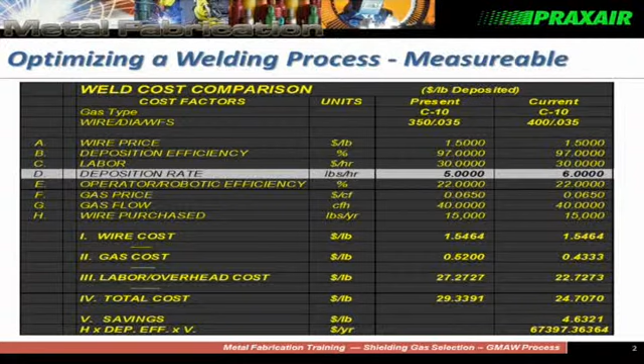One of the other things we don't often consider, in much of the welding done in North America and Europe, is that the cost is not so much in the consumables, but in the labor and overhead cost. That's obviously affected by deposition rate and welding speed, but also by how much post-weld processing we need to do, and the impact of welding fume on the overhead operations of our facility.

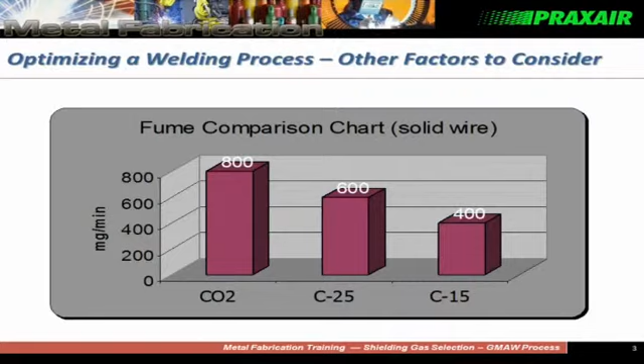So let's take a look at a couple of other factors that may affect this. We've heard about fume—just changing the shielding gas for a gas-shielded welding process can lower the fume, going from CO2 to 25% CO2 in argon, or 15% CO2 in argon. As we lower the CO2 content of the shielding gas, it affects the amount of welding fume generated. That's one thing we could look at.

So again, a little less post-weld processing would affect this operation. Spatter level and bead shape also affect the productivity and cost of the welding operation.

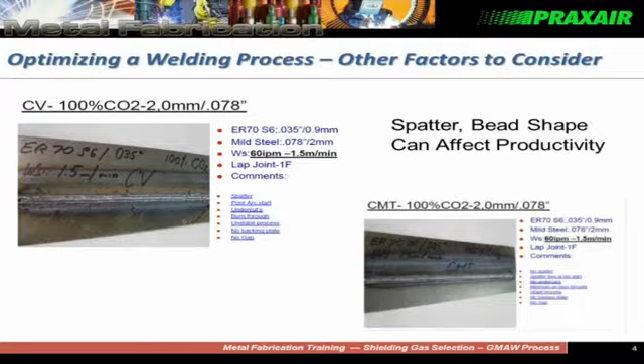So we're going to walk through a little bit of the process optimization steps you might consider. Typically for a given operation, you'll have a material type, thickness, and surface condition to deal with—it's the material you have to utilize in your facility.

Most typically, you'll have selected a welding consumable type—maybe a flux cored wire, a solid wire, or a stick electrode, but we'll focus on gas-shielded processes here. Typically, you'll have decided on the process based on the equipment. With flux cored or solid wire, it could be globular transfer depending on the shielding gases used. With solid wire, it could be spray transfer, short circuiting transfer, or pulsed metal transfer. So the equipment will, to a degree, determine the process we can use.

But some of the variables we don't often look at are the shielding gases—I mentioned earlier it could affect fume generation—and the welding power source. With the technology available today, if you go down on the show floor and look at the major suppliers of welding equipment, you'll see you can literally tailor the output of that power supply to a specific welding process and a specific welding material. I'll show you a couple examples of that.

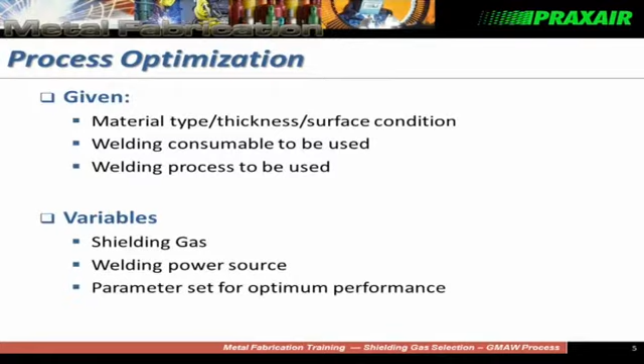And then lastly, we talked about optimizing the performance—are you using the appropriate current levels, voltage levels, and so on for the actual application, or can those be adjusted to get better performance?

The example I'm going to use is welding high nickel alloys, sometimes stainless steels, but typically high nickel alloys are very challenging materials to weld. One of the reasons is the weld pool is very viscous—it's not fluid, it doesn't want to flow well. So you tend to get weld beads that are not very well wet out, and travel speeds are slow because the material doesn't want to flow.

Typically, in other welding operations, you might add something like oxygen or CO2 to a shielding gas to improve the fluidity of the weld pool. But with nickel, you get a very tenacious oxide on the surface that actually makes it harder to get the material to flow. So there's some real limitations as to what you can do.

And it has very poor transfer characteristics. It tends to be pretty spattery, and again, weld bead shape is not real good.

So we looked at this area to see what we can do with some of the variables I mentioned—shielding gas, power supply, parameter optimization—to make this welding process better, and how that process optimization affects things from a cost standpoint, and also from some of the other things we talked about.

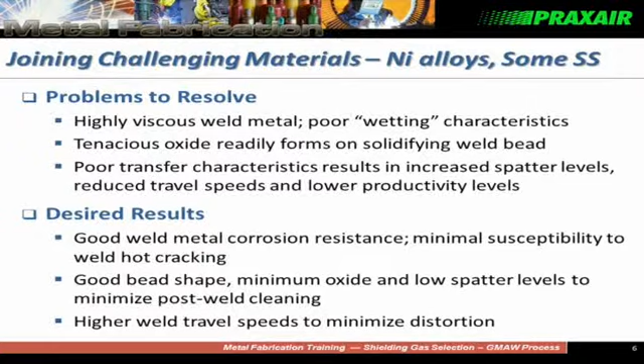So the desired result is obviously a good quality weld metal, and we'd like to minimize the amount of post-weld processing—that's grinding, defect removal, anything like that. And obviously to be more productive if we could get travel speeds higher.

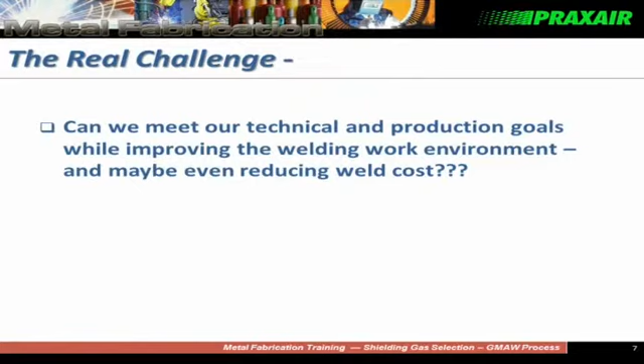So the idea here is, can we meet the technical goals of fabricating a material out of these nickel alloys while improving the overall work environment—from a welding fume standpoint, from a noise standpoint, from a dust and dirt standpoint.

So we're going to look at the shielding gas first. For those of you who've used a gas-shielded welding process, typically what is the shielding gas supposed to do? It's supposed to protect the molten material from being exposed to the atmosphere.

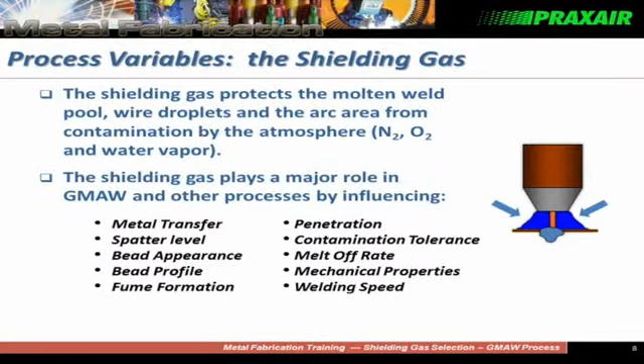But what I'll show you in a minute is that actually the shielding gas can control a whole host of variables—the type of metal transfer you get, the amount of spatter you might generate in the welding operation, all kinds of factors related to the appearance of the weld bead.

So by matching the shielding gas selection with the consumable and the process, we can start to affect some of this optimization.

Good example here is argon and helium. Why do we use argon or helium or hydrogen in some cases? When we're talking about stainless steels and nickel, we can use some hydrogen because it doesn't have a negative effect on the properties of the weld.

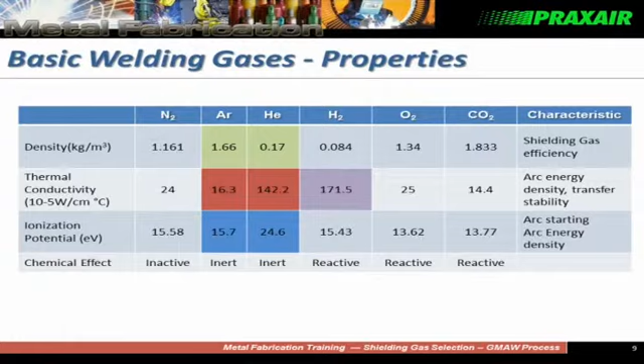One of the reasons here is the thermal conductivity of the gas—how much of the energy generated in the arc gets transmitted to the base material. This relates to fluidity, this relates to travel speed, this relates to actually controlling metal transfer.

Argon has a much lower thermal conductivity, but it has an advantage with ionization potential, which relates to how easily you can start an arc when using an argon-based shielding gas. Helium is much higher—it's much harder to start an arc. Arc starts typically can relate to defects.

Poor arc starts can relate to defects, which can relate to having to remove those defects, can relate to spatter—again, more post-weld processing. So there are different properties of the gases that we take advantage of to optimize a welding situation.

So basically we use mixtures of gases because we try to balance the properties of the gases. Argon is inert, with easy arc starting characteristics. Helium has that increased heat transferability, also inert.

We use materials like CO2 or carbon dioxide and oxygen to increase the stability of the welding operation, often to increase the fluidity of the weld pool in carbon steel welding and in other materials. And then where we can, we use hydrogen as well.

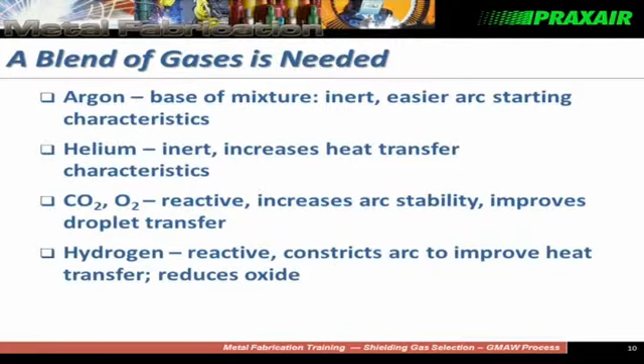One of the interesting things about hydrogen is not only does it have good heat transfer characteristics, but it can remove oxides. It's a reducing gas, so it reacts with oxides on the surface to get a cleaner weld with less oxide, which could relate to less post-weld processing.

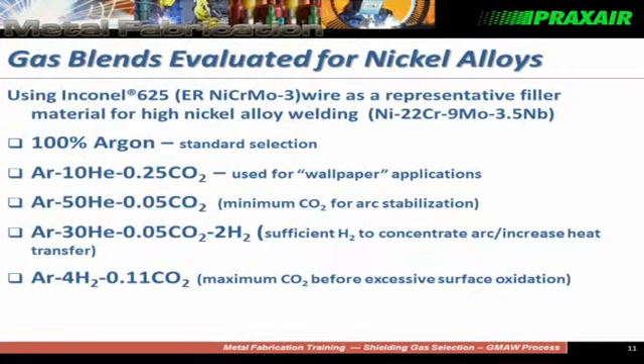In this particular example, what I'm going to show you is an optimization where we looked at a variety of different shielding gases. Some of them just pure argon, argon with a little bit of helium and some CO2, argon with more helium and a small percentage of CO2, and here's one with some hydrogen. These two have hydrogen. We were looking at a variety of blends to see how we could optimize this situation.

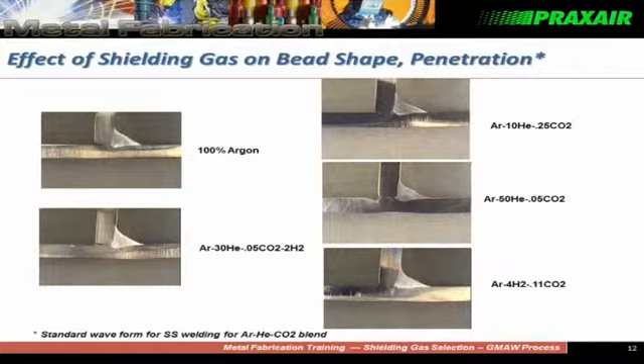Just to show you what some of the shielding gas can do - this is all done under similar welding conditions. You look at different bead-shape characteristics you get by just changing some of the gas blends. Different penetration, different surface characteristics. Some are flatter - just looking at the cross-section, you don't get a full picture of what the weld bead looks like. Like this argon looks pretty good, but actually the surface is fairly rough if you looked at it. The shielding gas affects some of the characteristics of the welding process.

Now, shielding gas is one thing, but what about the type of metal transfer we're using? What about the power supply characteristics? Well, one of the most flexible types of metal transfer we can use today is pulsed MIG transfer. This is a spray-type transfer where you get discrete droplets of metal transferred at a fixed frequency. It's like conventional spray transfer, which you get in argon-based shielding gases with solid wire welding and metal core arc welding, where you get a stream of droplets. Here you get a discrete number of droplets.

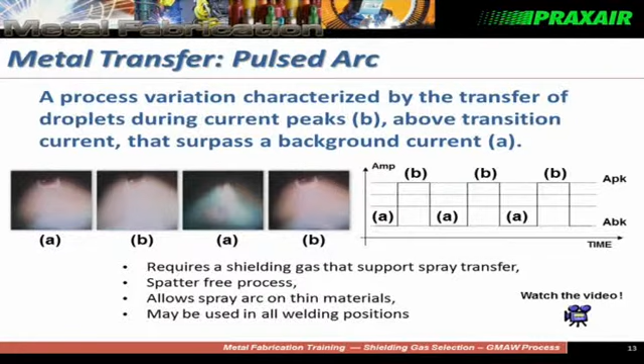This is done by a power supply changing current levels from a low level that maintains the arc to a higher level that provides enough energy to transfer droplets. This process begins to allow you to control how those droplets are squeezed off the end of the wire and transferred, and now control things like spatter and bead shape with power supply characteristics.

These are, for pulsed MIG welding, the characteristics you can control: the peak current, which is the maximum current that squeezes off the droplet; the background current that establishes the basic arc length and heat input of the system; the pulsing frequency, which relates to how many times that current level goes up to a high level and squeezes off a droplet; and other characteristics of the pulse, how wide and how high - again, the amount of energy you put into the system.

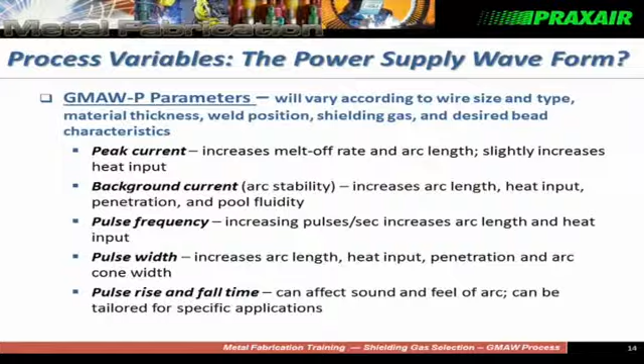And this is related now to the types of materials we're trying to use. In this particular case, many pulsed power supplies build a specific electronic waveform into the power supply for a specific type of material. So you'll find one for carbon steel with a certain shielding gas, you may find another for carbon steel with another type of shielding gas, you'll find them for stainless steels, you'll find them for aluminum. Again, the power supply is helping to tailor and optimize the system.

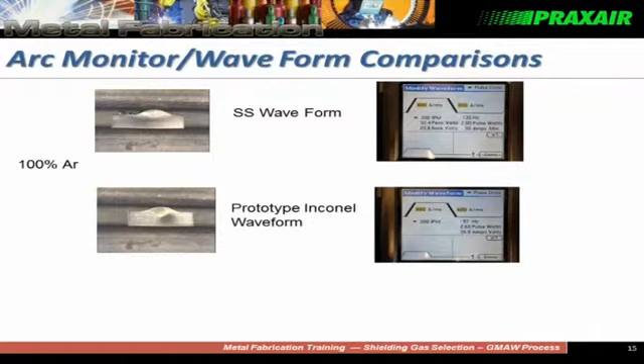Taking another type of waveform developed for specific types of nickel alloys - what you can see here is a little bit of shadowing, but the bead is actually a little bit flatter and has much deeper penetration. So by changing this waveform using the same materials, we've affected the bead shape.

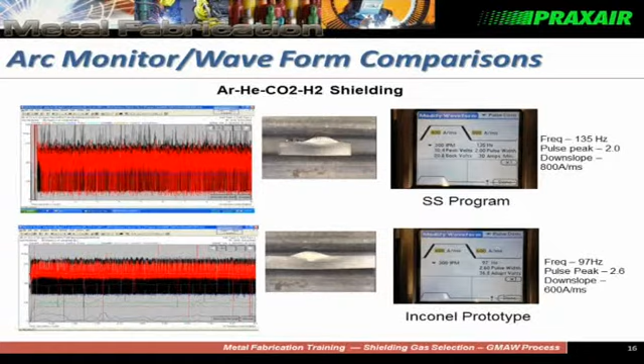What's happened here is the frequency of this pulsing has changed from 135 to 97. The height of the peak has gone up - it's a higher peak, but less frequent peaks. So tailoring this waveform to a specific material begins to optimize the welding system for this particularly difficult-to-weld alloy. This is just to give you a little bit of a visual picture.

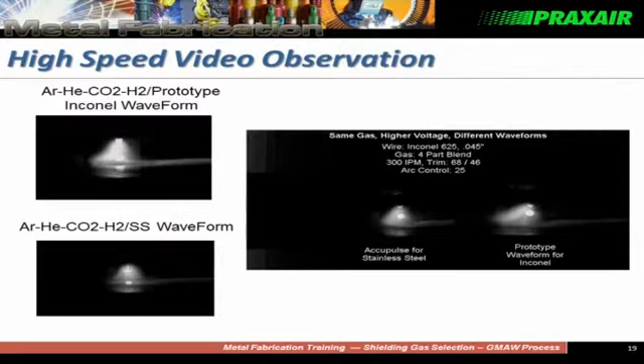Again, here's the prototype waveform. What you can't tell here is that the bead shape is not too bad, but the surface is actually a lot rougher than this particular one. So particularly with these high alloy specialty materials, bead shape and surface condition are very important, and if they're not flat, if they're fairly rough, they require post-weld grinding and other processing.

So I'm going to just skip that one.

One of the things you get to with process optimization, other than fume reduction, which is obviously a good goal, is that when you have less post-weld grinding needed, there's less grinding dust and reduced noise. Some numbers I found: typical noise level in a fabricating shop is 85 to 95 dB. Gouging can increase this - if you've done arc gouging, you know it's very loud. But use of a grinder is also a significant noise polluter, so reducing the amount of grinding required would have a significant impact on noise levels in the workshop.

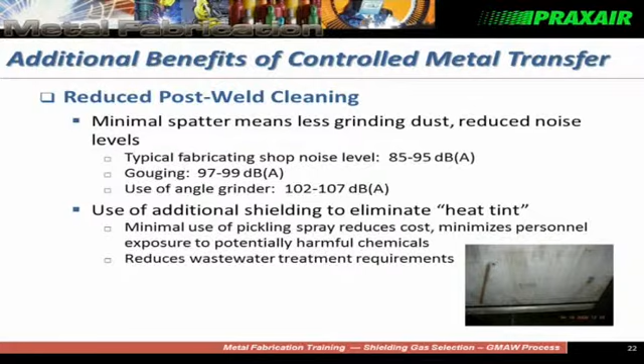One of the other things we ran into - I had worked with a customer on a welding related problem. This is the back side of a stainless steel dump truck, one of these large trucks with stainless steel containers in the back. They were welding stiffeners to stiffen the surface of the truck containers, but from welding these stiffeners on, the outside surface you'd see from the street discolors - this is what it would look like. Because they got this heat tinted surface, they had to use pickling chemicals to remove the oxide to improve the appearance. As a result, they were having a disposal issue with the EPA because of disposal of these chemicals, so they were looking for an alternative way to avoid use of chemicals.

Over here, it's not perfect, but this was done using just some nitrogen on the back side of the weld through a little diffuser to shield that back side of the weld. The shielding wasn't on when the arc first started, but it essentially eliminated that heat tint surface - another concept, another way to look at optimization to eliminate the use of some of these chemicals.

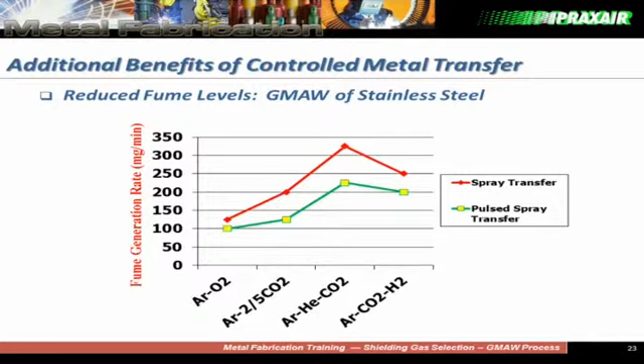So again, process selection - what Kathy talked about for this EPA-related documentation is what am I doing to reduce or control fume or control emissions in the welding process. Is that argon O2 mix 97:3? Actually, in that case, it's just 2% oxygen. Argon oxygen gives you the lowest fume levels of any types of shielding gases because the fume is definitely affected by the CO2 content. Argon oxygen is limiting for some other reasons, but for fume, it's particularly the best.

So just in summary, looking at your welding process, not only can you look at fume levels, you can look at how to minimize other processing steps you need to take, whether it's spatter removal, weld bead shaping, or removal of oxide. There's a variety of ways of controlling the welding process through consumable selection, through power supply selection, and the capabilities of the power supply.

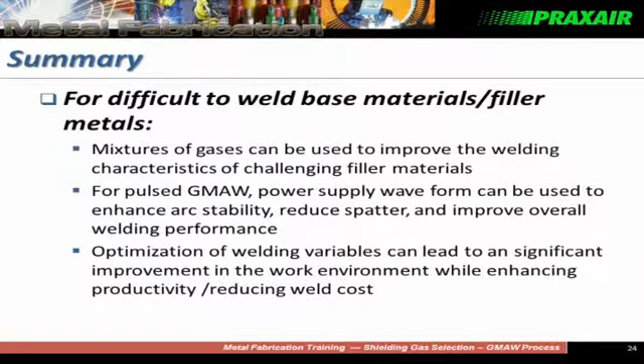So mixtures of gases can be used to improve the welding characteristics of a system. Types of power supplies can also help, along with optimization of variables. Basically, I think you have a pretty good opportunity to look at completing both your technical goals and also improve the work environment that you're operating in.

Oops, no, I did that same thing.

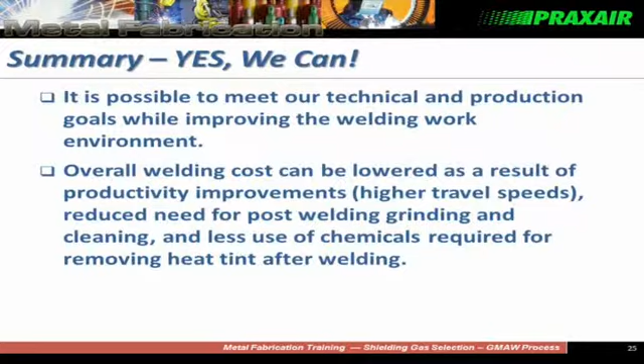So we think, basically, all these things - often what's really surprising is that even when you institute some of these things that look like they will cost you money, in effect, when you look at the overall cost of welding, they actually reduce the cost of the welding operation. So that's just some other things for you to think about. We'll be hearing more later in the program from other speakers more focused on fume reduction and parameter control, so hopefully this helps give you an additional viewpoint.